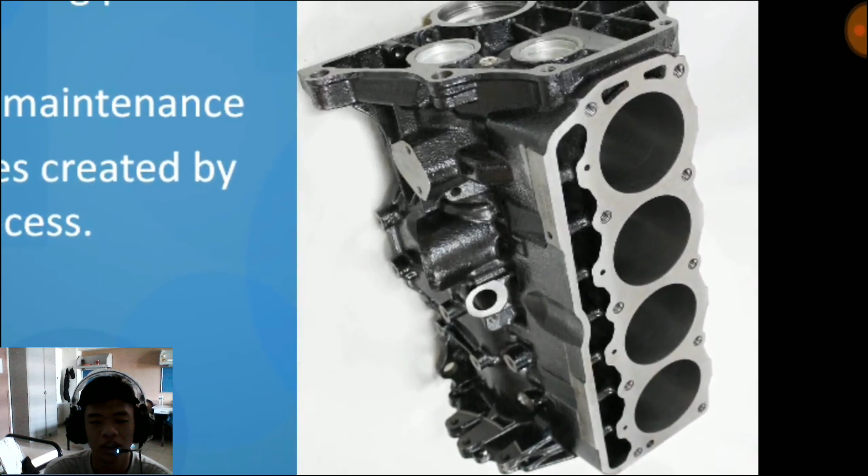Cylinder block, also called engine block, is the main structure of the engine. It gives space for the cylinders and provides passage for the coolant, exhaust, and intake gases to pass over the engine, and houses the crankcase and camshafts. As the engine block is the main housing of the engine, it must meet several requirements, including wear resistance, long-lasting maintenance, and the ability to withstand the pressure created during combustion, as well as high temperature and vibration during running conditions.

For the main requirements, the key feature is the material used.

Sorry, Chen, may I interrupt? I'm not clear which is the main housing of hundreds of parts found in modern engines.

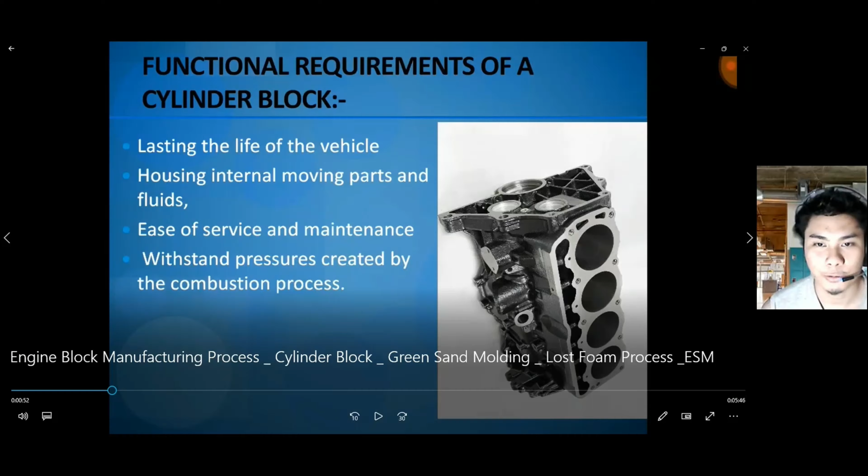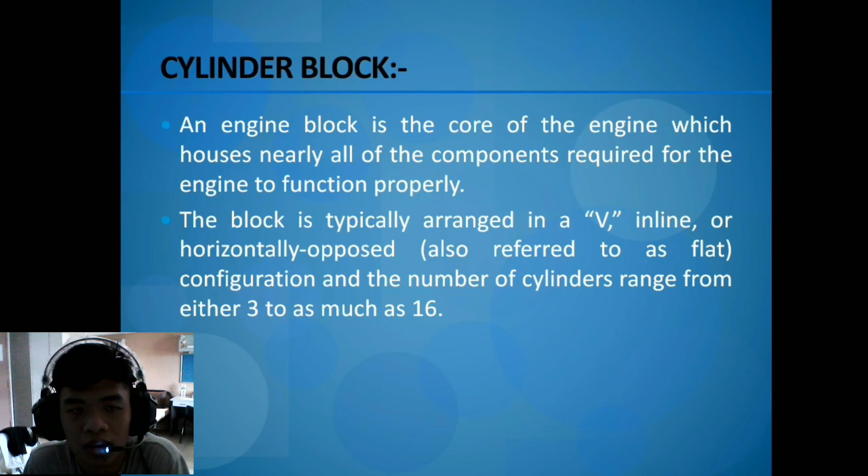Thank you. So Khairil has asked a question: which is the main housing of hundreds of parts found in modern engines? The cylinder block, also called the engine block, is the main structure of the engine which gives space for the cylinders. So the answer is the cylinder block, or engine block, is the main housing of hundreds of parts found in modern engines.

Okay Chen, I have one question to ask you. What is the quality consideration during the production? Arif Najmi also asked the second question.

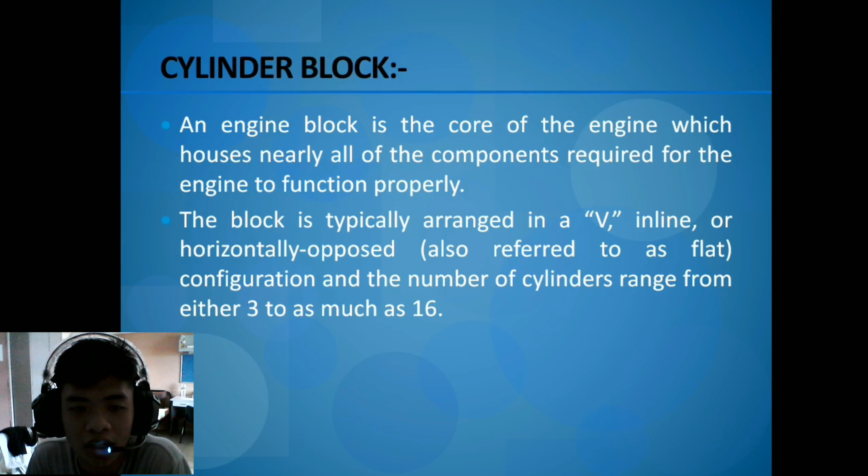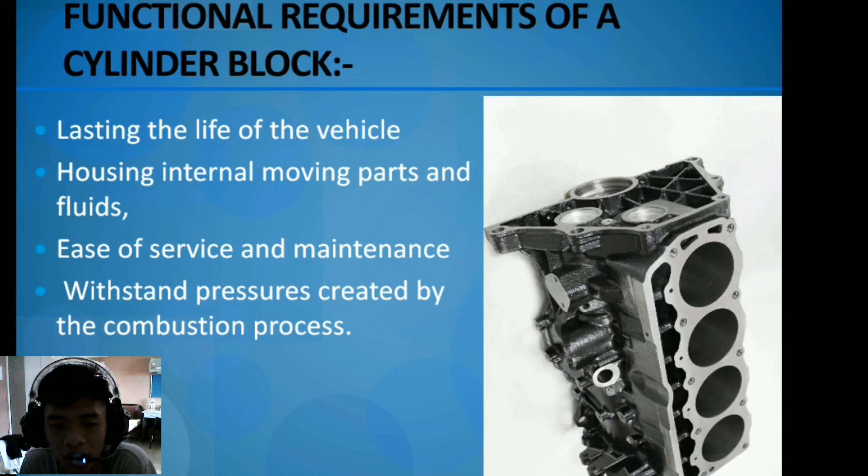So the answer is: strength of the sand has to be high to maintain a rigid shape, and permeability is related to the size of the sand grains. Higher permeability can reduce the porosity of the mold, but lower permeability would lead to a better surface finish. The thermal stability of the mold should be high to resist damage such as cracking due to the molten metal. The ability of the sand to compress during solidification has to be high, otherwise the casting will not be able to shrink freely in the mold, which may result in cracking.

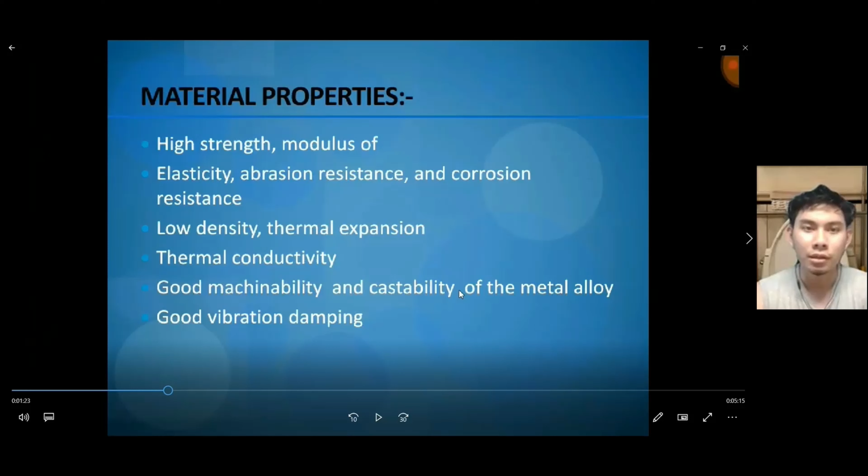Okay Surya, so you're unsure about vibration damping. Vibration damping is the process of absorbing or changing vibration energy to reduce the amount of energy transmitted to the equipment, meaning the cylinder block has the ability to reduce noise.

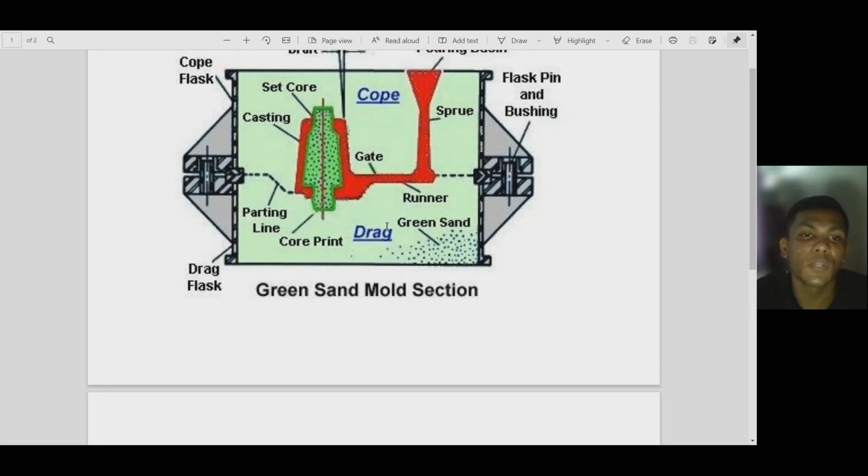The steps involved in green sand molding are as follows. First, one half of the pattern is placed on the molding board. The drag is placed with the dowel pins down. Molding sand is filled in the molding box to cover the pattern. The drag is completely filled with sand up to the top and rammed by the peen end of the hand rammer. Excess sand is leveled off with a strike bar.

The drag is turned upside down and parting sand is applied on the surface. The other half of the pattern is now placed correctly on the already placed half. The cope is placed in position on the drag and aligned using dowel pins. The sprue pin is placed vertically for the purpose of pouring molten metal. The risers are placed over the highest point of the pattern for the purpose of allowing gases to escape and identifying the level of molten metal.

Again, molding sand is filled in the cope box and rammed. The riser and the sprue pin are then removed.

The funnel shaped opening called a pouring basin is cut at the top of the sprue pinhole. The cope is lifted, turned over and placed on the floor. The pattern pieces are carefully removed. The gate is cut connecting the sprue basin and the mold cavity. The cope is placed carefully over the drag. And lastly, pouring the molten metal.

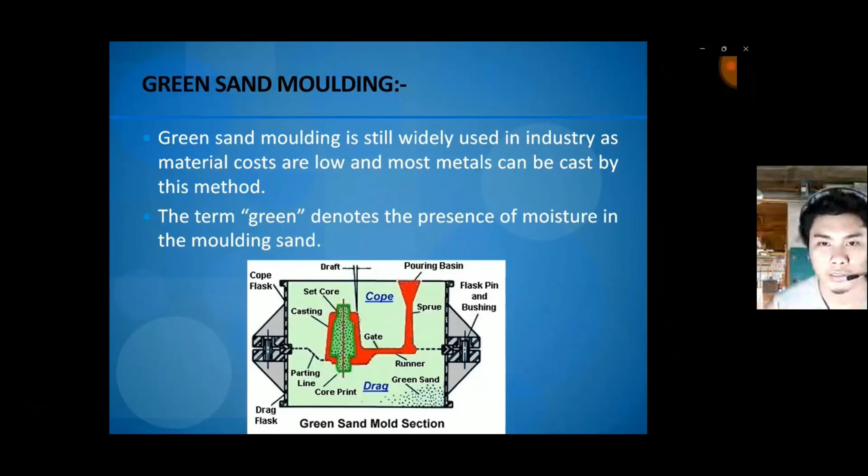I want to ask, what are the advantages of the green sand molding process?

Thank you for the question. The advantages of green sand molding include: green sand molds are softer than dry sand molds, which allows greater freedom in contraction when the castings solidify and cool. Green sand molds are quite strong for small depths as the gases can escape from them. Also, green sand molds do not require any baking operations or equipment, but dry sand cores are still to be used.

Surya, why do we use sand in the casting process?

Thank you. On the other hand, the disadvantages of green sand molding include: green sand molds cannot be stored for a long time, they are not as strong as other molds and are liable to be damaged during handling or pouring. The surface finish of castings from green sand molds is not very smooth, so they need a finishing process. Green sand molds lack permeability and strength, which causes certain defects like blowholes.

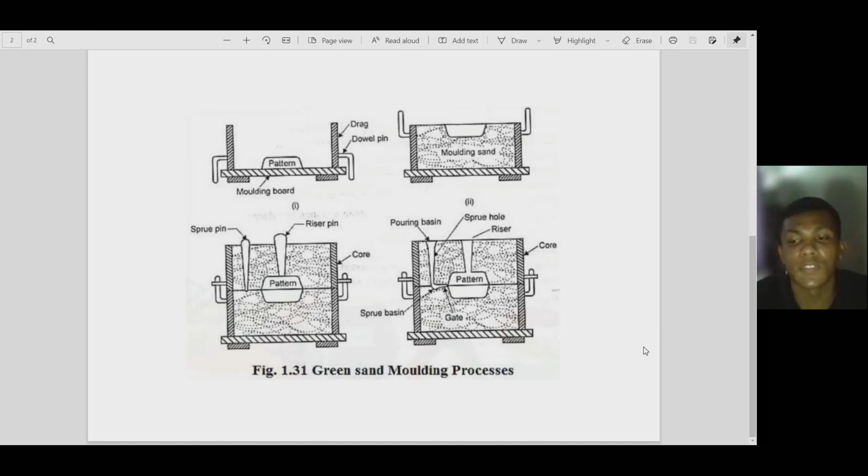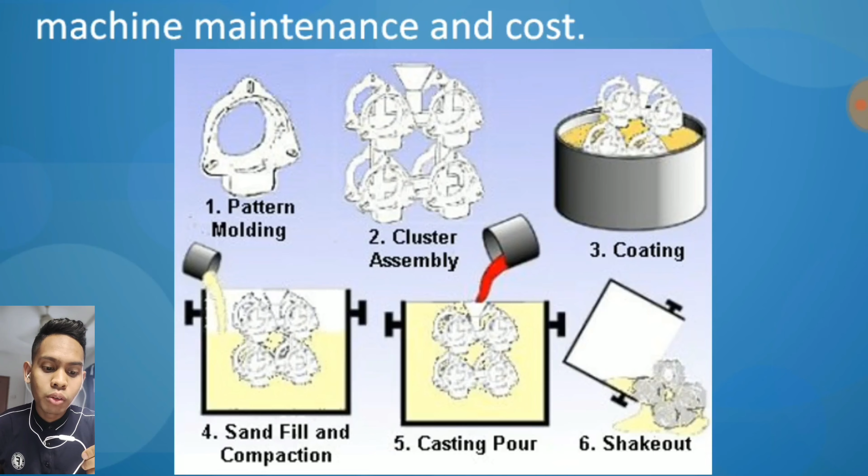Thank you. Okay, Bismillahirrahmanirrahim, so next we go to the lost foam casting. My name is Muhammad Arif Najmi Zulkifly, you can call me Jimmy, my matric number is 2190141. So after the first process, which is putting the polystyrene bead, we go to the second process of lost foam casting.

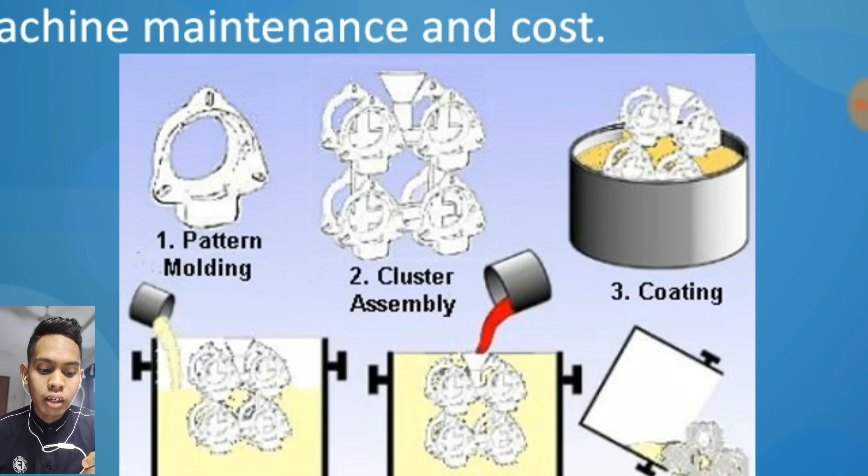After all the dimension parts have been done, we need to do the cluster assembly, which is combining each part to form a cluster. Then after we get the cluster of the parts, we will put it into the basin.

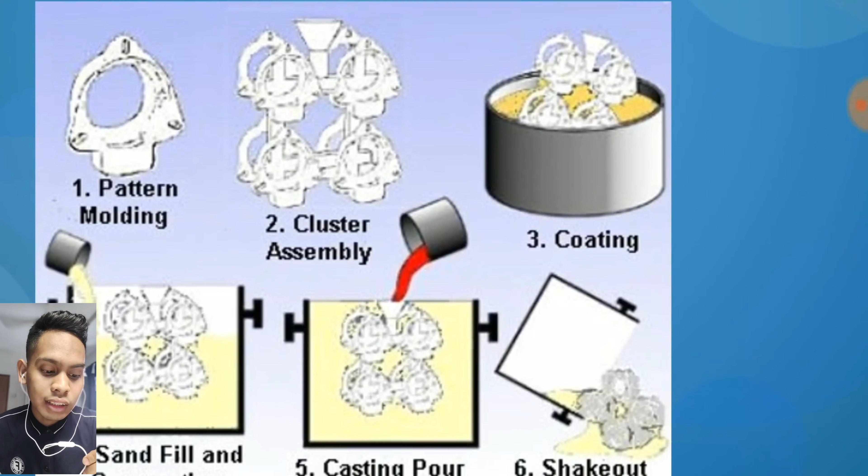After we put the cluster into the basin, we go to the next process, which is the sand fill and compaction process. In this process we combine the cluster and put it into the basin, then we fill sand into the basin and compact it.

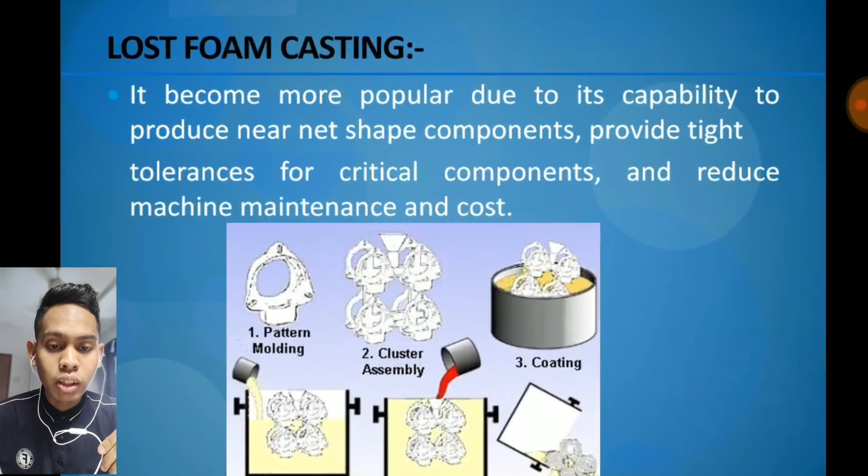After we have put the cluster into the basin and compacted it with sand, we go to the next step. We will pour the molten metal into the cluster assembly, and we let the molten metal that we poured into the basin become hard, let it become solid, in order to get the pattern that we want.

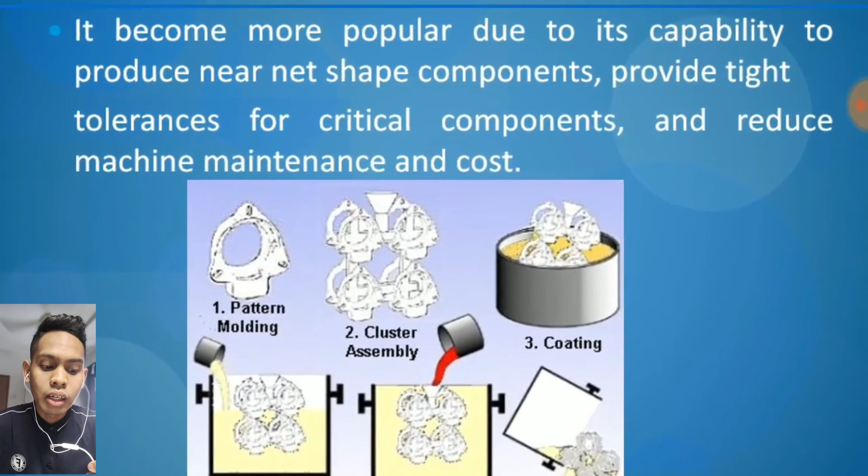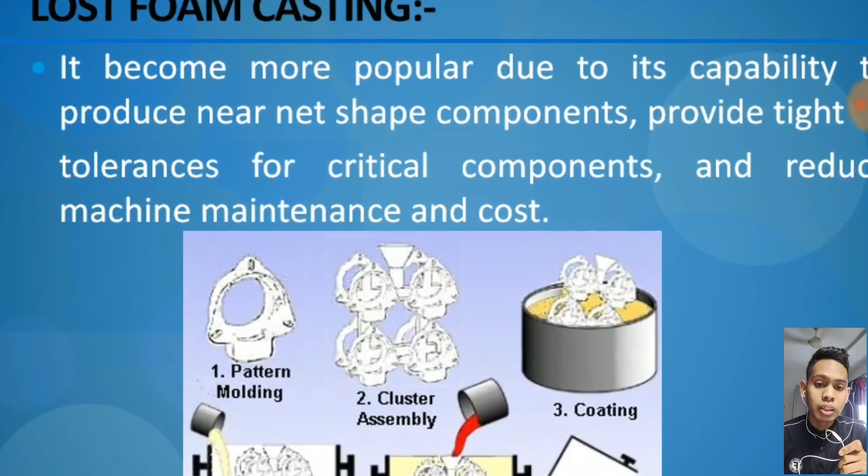After the molten metal has solidified, following the shape of the cluster inside the basin with sand, we will bring it out. The molten metal has become solid, and finally we can get the metal with the dimension or pattern that we need. That is the final result of the lost foam casting process.

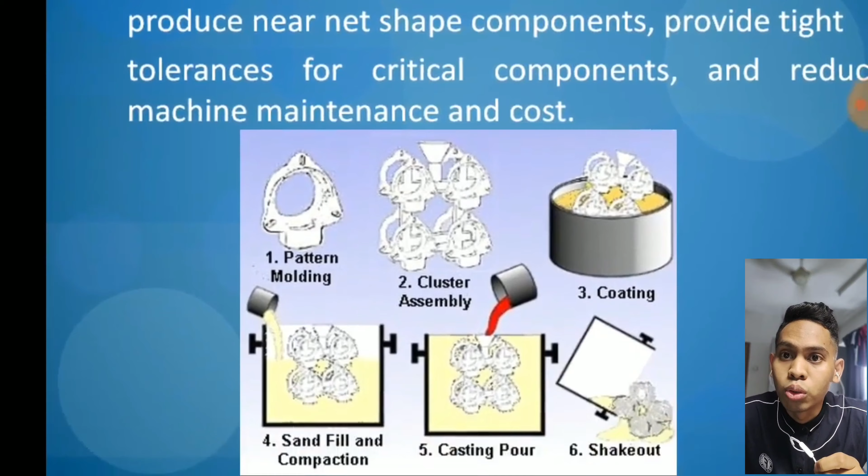So this method has become more popular due to its capability to produce intricate components. We can produce parts which are approximate in shape without needing to machine for the exact shape, since it already provides the exact shape. It also provides tight tolerance for critical components and reduces machine maintenance and cost.

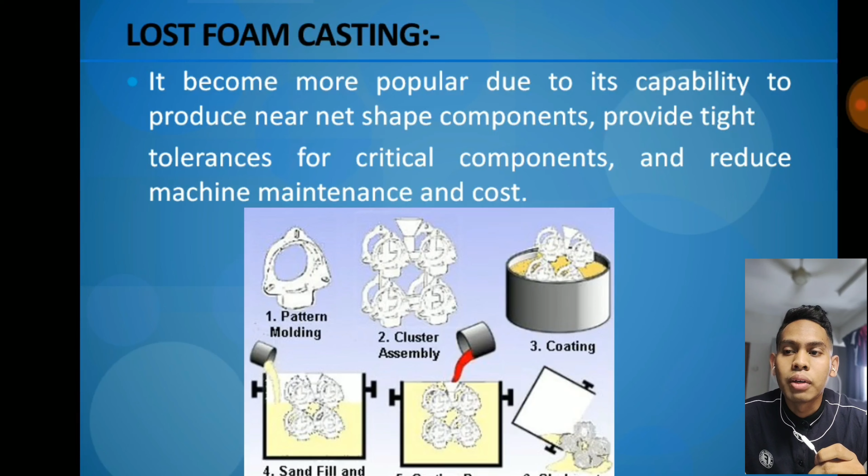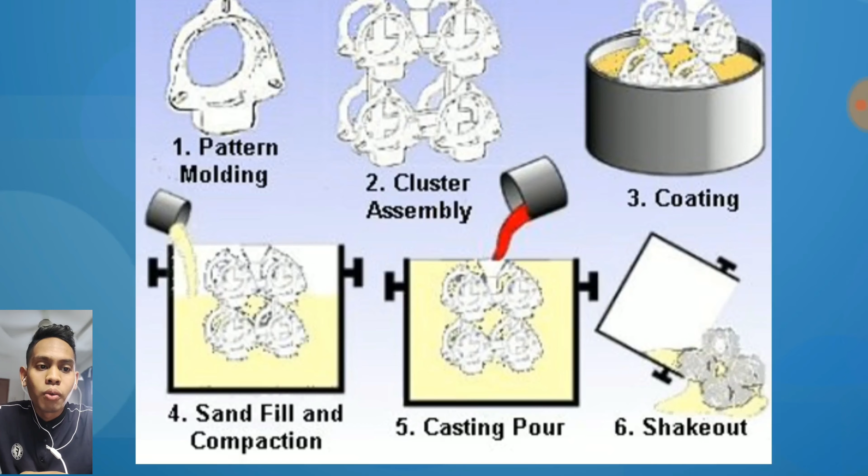I have one question for you. Why do you need to use sand in the casting process? Thank you, Surya, that was a good question. Why do we use sand in the casting process? Because sand is easy to compact and gives enough strength to the wall when we do the casting process.

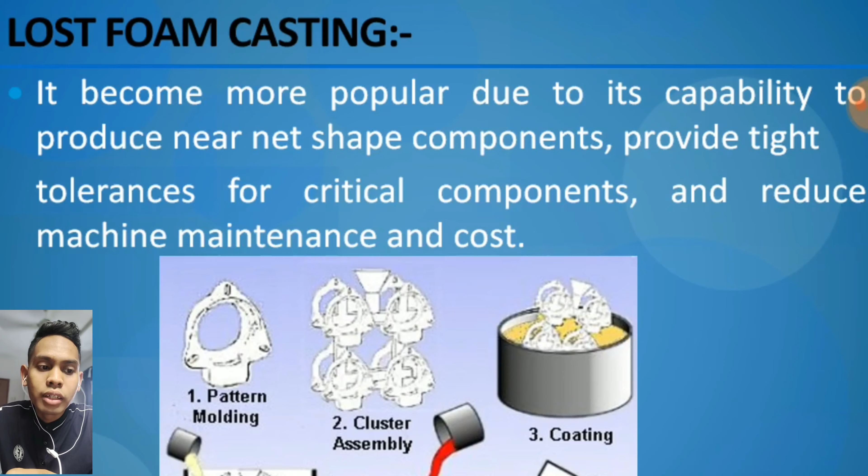Jimmy, may I know where the polystyrene bead goes or is lost when the metal is poured into the basin? Thank you, Chen, for asking. So where does the polystyrene bead go when we pour the melted metal into the basin? When we pour the melted metal into the basin, the polystyrene bead melts and dissolves, or enters into the sand particles, when we pour in the melted metal.